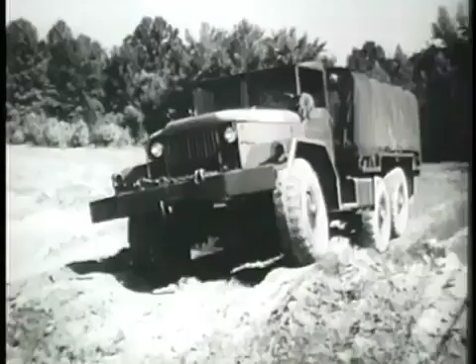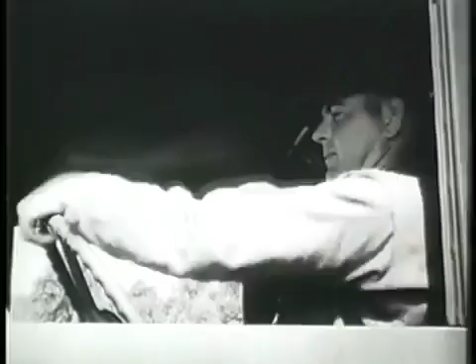Steering a heavy vehicle by manual effort only emphasized the need for a steering assist. This has been accomplished by adding a hydraulic system to the cam and lever steering mechanism. In this film, we will discuss the principles of operation of the hydraulic steering system.

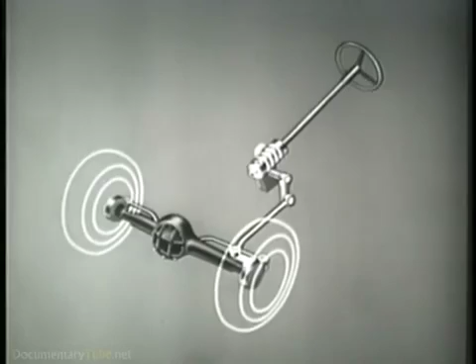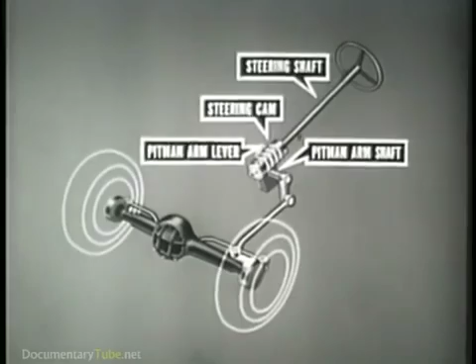This vehicle uses a cam and lever steering mechanism consisting of the following components: a steering shaft and cam, a Pitman arm lever, a Pitman arm shaft and Pitman arm, a drag link, and a tie rod.

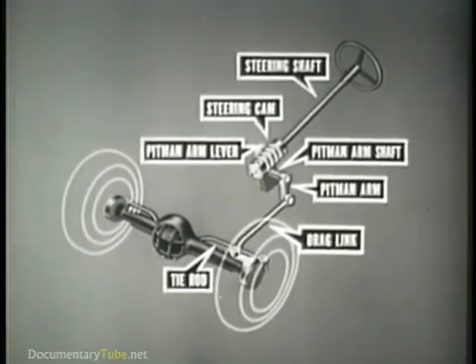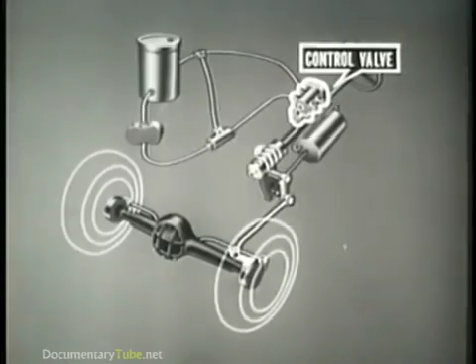To obtain the assist, a hydraulic system has been added to the cam and lever mechanism. The hydraulic steering system is made up of 5 major components: the reservoir, pump, relief valve, control valve, and power cylinder. These components operate on the principle of pressure differential.

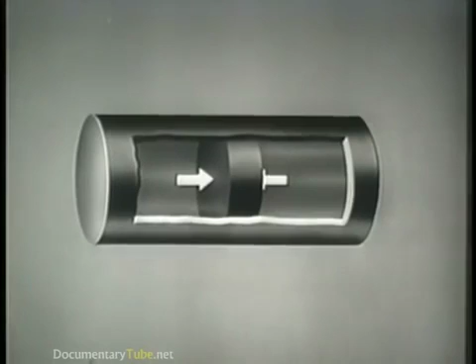Pressure differential is illustrated by this section of pipe. In the pipe is a movable block. The arrows on either side of the block represent equalized pressure. As pressure on one side of the block is increased, a pressure imbalance or differential is created in the pipe, moving the block in the direction of the lower pressure. The moment the pressure on the opposite side of the block is increased to equalize the pushing force, the motion of the block is stopped.

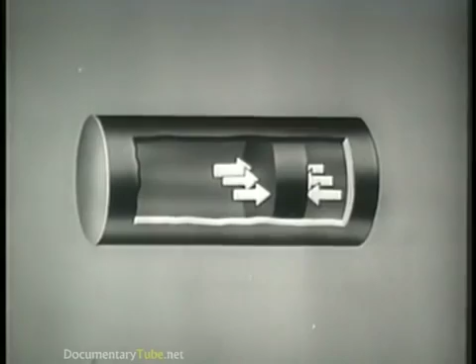In like manner, as the fluid pressure is increased on one side of the piston, it will be moved by pressure differential, aiding in steering the front wheels through the steering linkage.

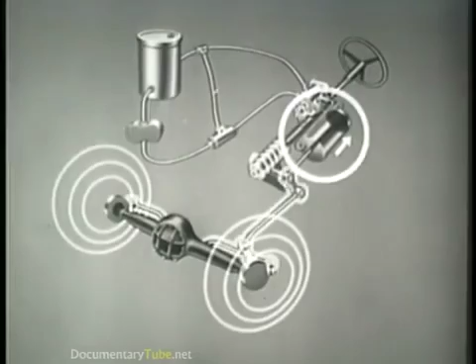To aid in illustrating the internal function of the hydraulic system, a schematic diagram will be used. The steering linkage from the Pitman arm lever to the front wheels will not be shown.

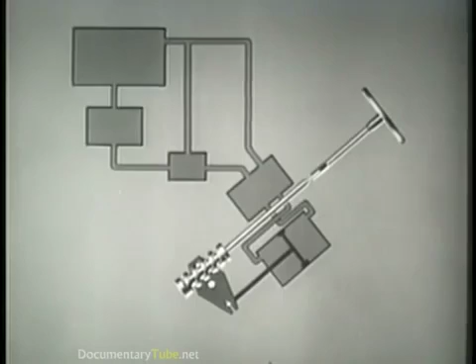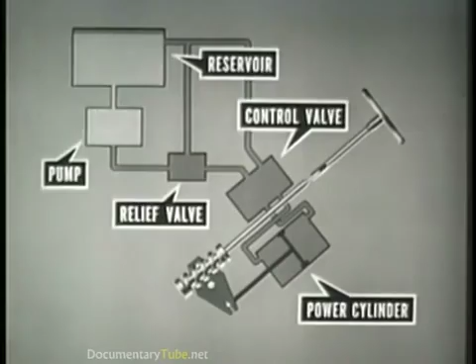Let us view the 5 major components of the hydraulic system as they operate progressively to deliver the steering assist. The reservoir supplies fluid. The pump, driven by the engine, delivers the fluid under pressure to the relief valve and control valve.

The control valve, actuated by the steering shaft, directs the fluid to the power cylinder. The power cylinder converts hydraulic pressure into mechanical force by means of a piston.

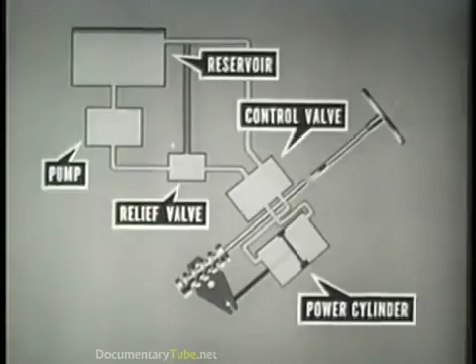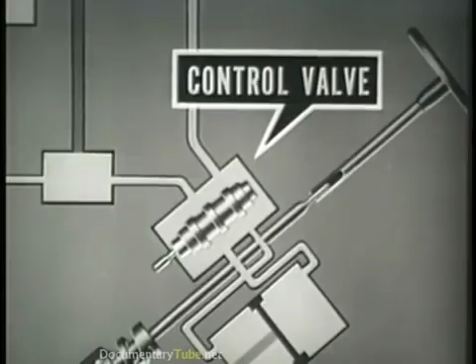The control valve is the heart of the hydraulic steering system. The control valve has a spool which directs and controls the flow of fluid to the power cylinder.

With the fluid removed, let us look at the internal construction of the control valve. The spool has lands which control the flow of fluid through the passageways to the power cylinder.

The fluid enters the control valve through the inlet port and flows around the spool in channels leading to the power cylinder. After the cylinder has been filled, all fluid then flows to the reservoir.

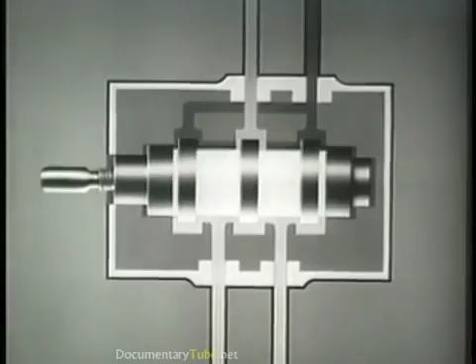In order for the hydraulic steering assist to operate, it is not only necessary for the cam to rotate, but it also must be able to move up and down.

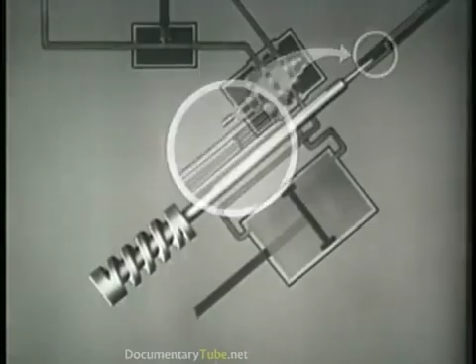A spline connection makes this possible. Were it not for the splines, the steering wheel itself would move up and down.

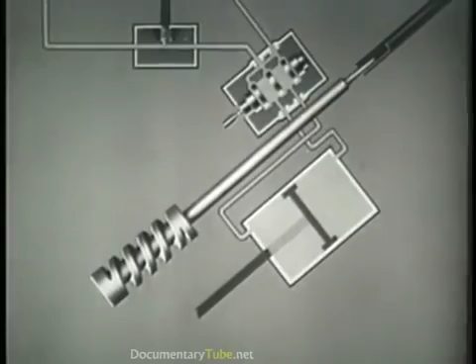The cam is held in center or neutral position by a spring at each end, supported by the steering gear housing.

The pitman arm lever, which actuates the pitman arm, has one end fastened to the piston rod, the other in mesh with a groove in the steering cam.

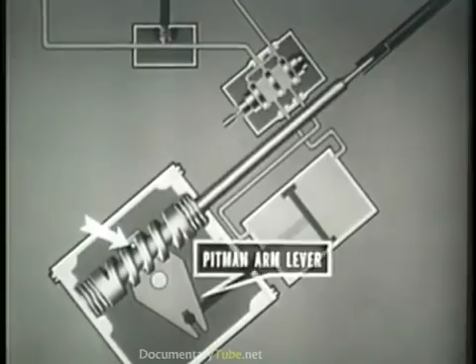When the steering shaft is turned, it requires a greater effort to turn the pitman arm shaft and lever than to compress the springs at either end of the cam. This is so because the pitman arm shaft and lever are connected to the front wheels.

This action causes a cam spring to be compressed, allowing the cam to move up or down, depending on the direction that the steering wheel is turned.

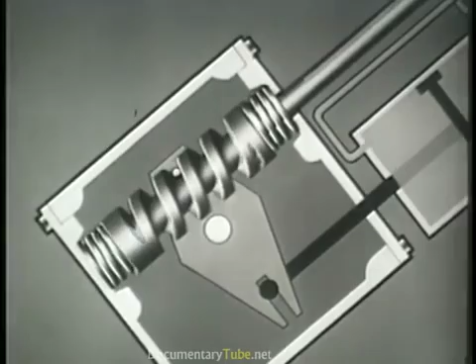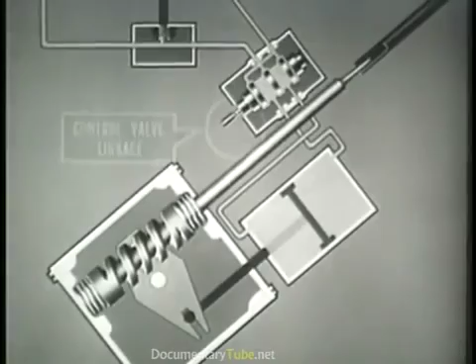This up and down movement of the steering cam actuates the control valve through the valve lever linkage. Full pressure of the hydraulic system is applied with only a few thousandths of an inch of control valve travel.

In neutral position, all fluid flowing into the valve from the pump is returned to the reservoir through channels in the upper part of the valve housing, and no steering assist is being delivered.

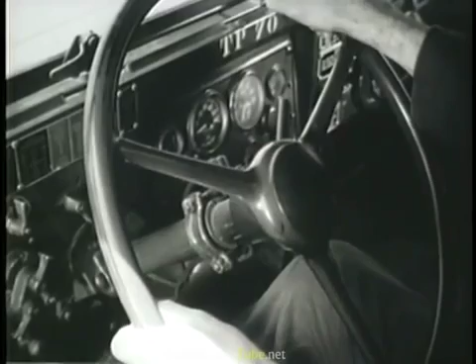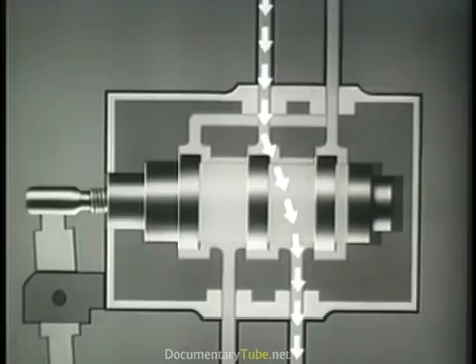As the steering wheel is turned, the up or down movement of the cam actuates the control valve lever, shifting the position of the valve spool. The spool lands corresponding to ports on the valve housing direct the flow of fluid from the pump to the power cylinder.

This flow of fluid causes an immediate pressure increase on one side of the piston in the power cylinder. At the same time, fluid from the other side of the piston is displaced by pressure differential and forced up and around the unrestricted passageway in the control valve to the outlet port leading back to the reservoir.

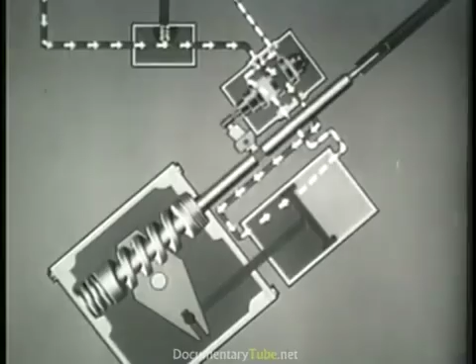The pressure differential in the power cylinder moves the piston and piston rod, thus applying a mechanical force to the pitman arm shaft lever, turning the wheels in the desired direction.

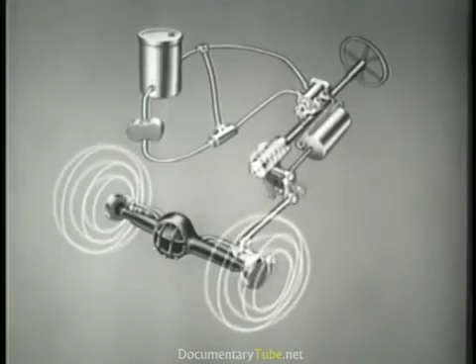When the piston reaches the end of travel in the power cylinder, the pump continues to deliver fluid, causing an increase in operating pressure. The relief valve provides an escape for this excess pressure back to the reservoir.

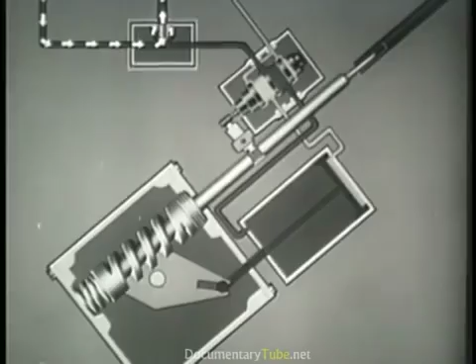After completing a turn, the driver releases tension on the steering wheel, and the steering system is returned to straight-ahead position by the steering geometry of the front wheels, allowing the hydraulic system to return to the neutral position.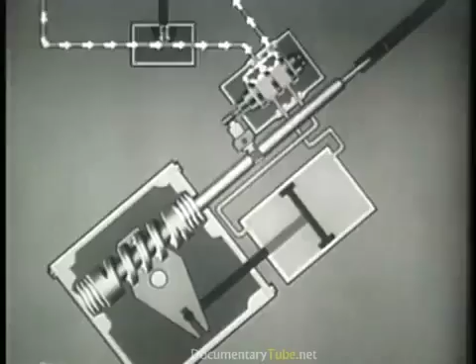To steer in the opposite direction, the cam actuates the control valve lever the other way, and pressure is now directed to the opposite side of the power cylinder piston.

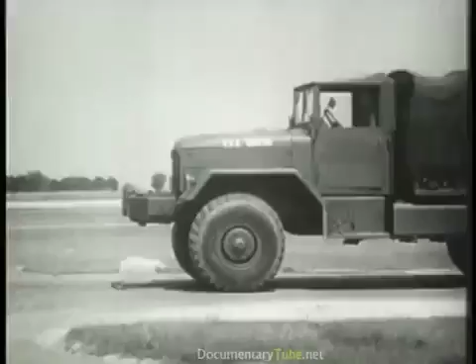When the front wheels are held in a constant turn, the cam will not be rotated. The pitman arm shaft lever is held stationary toward one end of the steering cam by the increased pressure on one side of the piston.

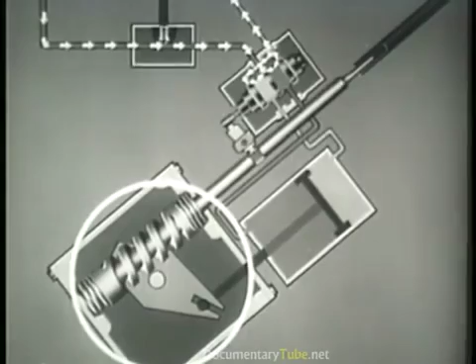The tendency of the steering geometry to return the wheels to the straight-ahead position is overcome by the driver, who maintains a constant force on the steering wheel in the direction of the turn. These two opposing forces cause the steering cam to partially compress the upper cam spring.

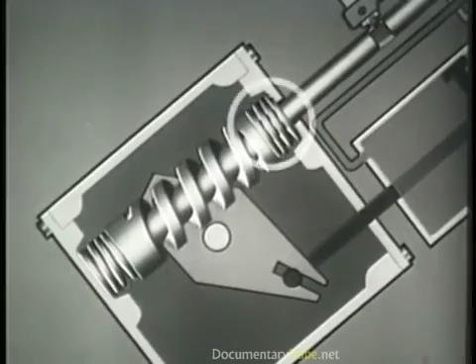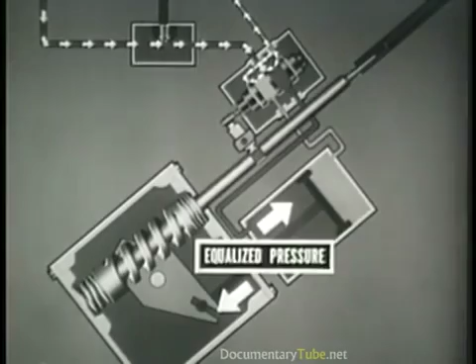This also moves the control valve linkage and positions the valve spool where fluid pressure will equalize the force exerted by the steering geometry acting on the piston rod. The front wheels can then be held in any desired degree of turn.

On return to neutral, all fluid from the pump is directed back to the reservoir. The pressure is lowered throughout the hydraulic system, and the piston and piston rod do not function.

One of the steering problems of the heavy vehicle with cam and lever steering is road shock. Road shock causes kickback of the steering wheel and makes control of the vehicle difficult.

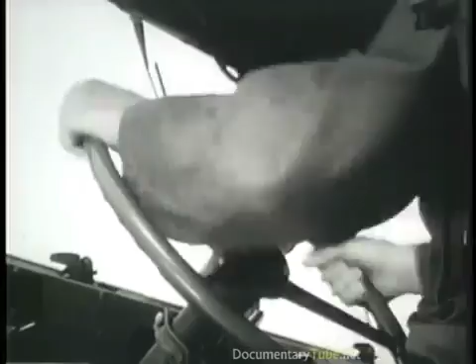On the other hand, heavy military vehicles equipped with hydraulic steering resist road shock through a reverse action in the power cylinder.

When one of the front wheels is subjected to road shock, the shock is transmitted through the steering linkage to the pitman arm and the pitman arm shaft lever. The pitman arm lever then actuates the cam, causing it to move up or down depending on which wheel receives the shock.

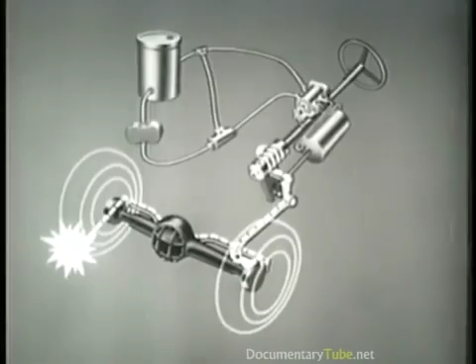The movement of the cam actuates a control valve, which in turn directs increased pressure to one side of the piston. This increased pressure will be equal to the shock received by the front wheel, causing the front wheels to remain in a straight-ahead position.

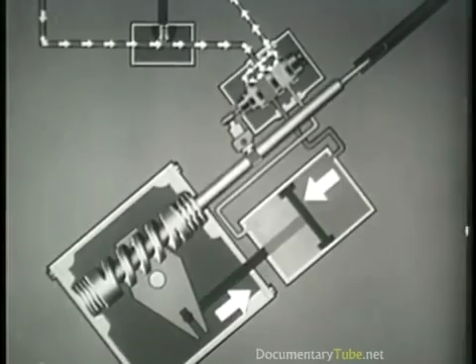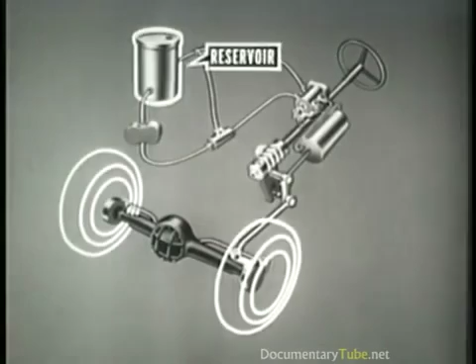Now let us review the operation of the hydraulic steering system. The reservoir supplies fluid. The pump, driven by the engine, delivers the fluid under pressure through the relief valve to the control valve.

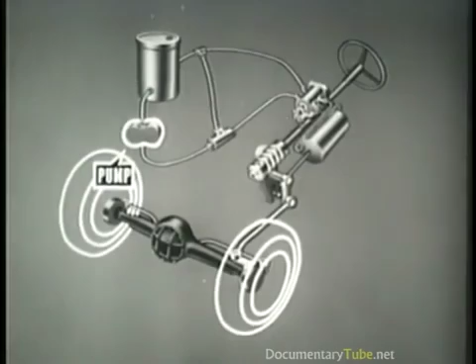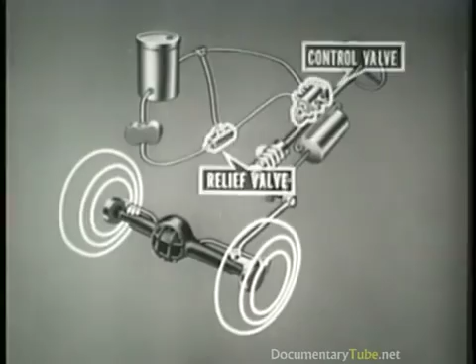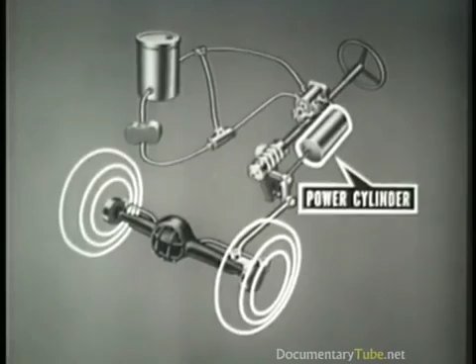The relief valve provides an escape for excess pressure back to the reservoir. The control valve directs fluid to the power cylinder. The power cylinder converts hydraulic pressure into mechanical force, which in turn actuates the pitman arm shaft and lever and the pitman arm, turning the front wheels of the vehicle through the steering linkage.

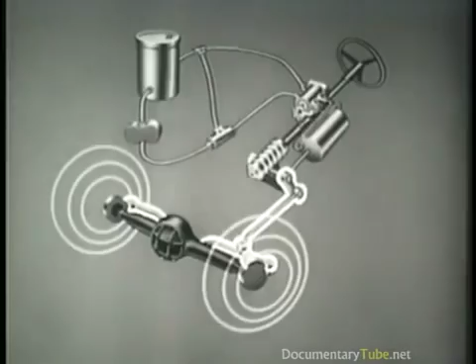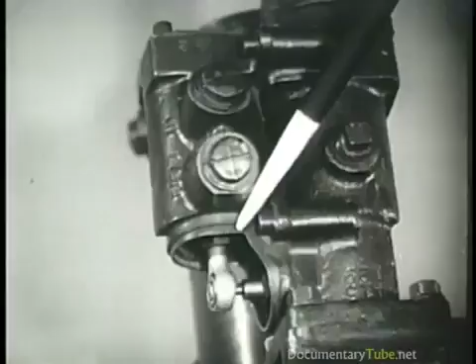In order for the hydraulic assist mechanism to operate, the steering cam must be able to move up or down to actuate the control valve. A spline connection makes this possible. The cam is held in center or neutral position by a spring at either end.

The slightest movement of the cam results in a pressure differential in the power cylinder and an applied force on the pitman arm shaft and lever and the pitman arm. The hydraulic steering system resists shock and kickback through a reverse action in the power cylinder.

With military vehicles getting larger and heavier to meet the demands of modern warfare, the hydraulic system is becoming increasingly important as a power assist in steering the vehicles.